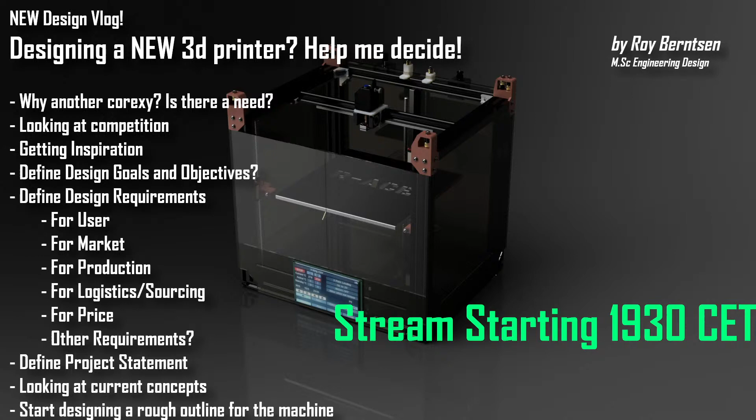Okay guys, so I'm starting another design vlog. It's been like 2 years since the last vlog, and I was pretty happy with it, and it's pretty much what I do best, so let's stick to what I do best and make another design, prototype and build vlog for a new 3D printer.

And we want this machine to be a premium one, so I need your help to decide what kind of features and functions and product choices we want for this machine. So I started making a document. Anything that you can chip in is very helpful, because I cannot do this alone. This is going to be a community-based thing. So let's have a look at what I started.

So bring you guys over to the other screen. Let me see. Just a second, guys.

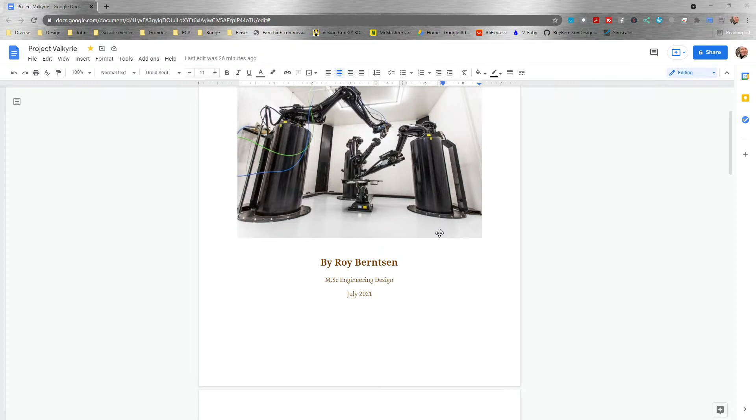There we go. Okay, so here you can see Project Valkyrie. Designing a high quality 3D printer, what I mean is a premium one. I already have done 2 printers. I designed my first printer in 2017, the V-King. Then we did the V-Baby in 2019. Then we did the V-King version 2 upgrade. We can have a look at those machines.

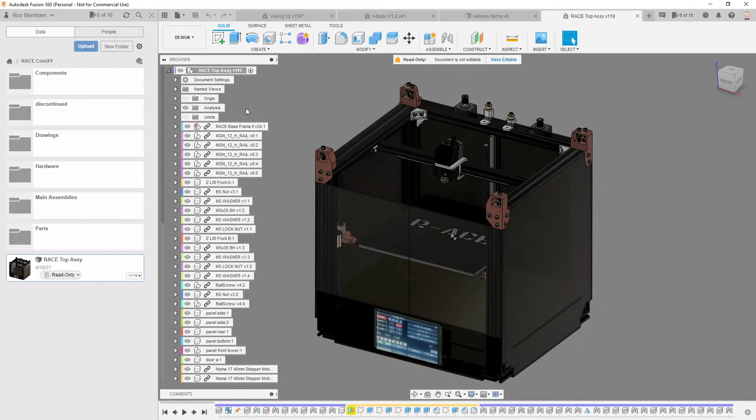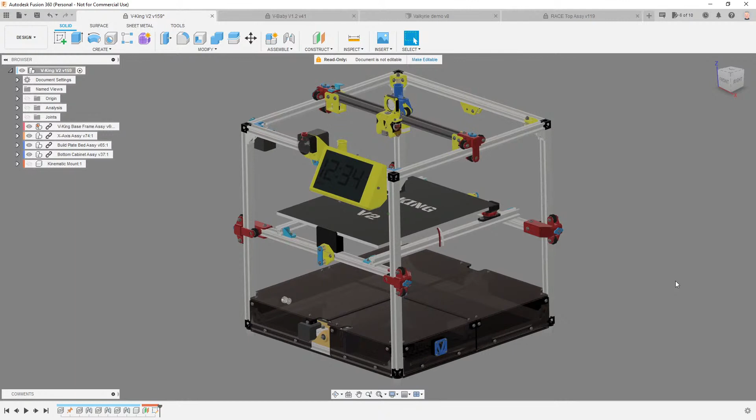So this is just a sketch basically. It's something I want to show you, because it has some functions which I would like to implement in the new design. So this is the V-King. Some of you know this machine from before. It has been downloaded like 10,000 times or something, and there's a big community building this machine all around the world.

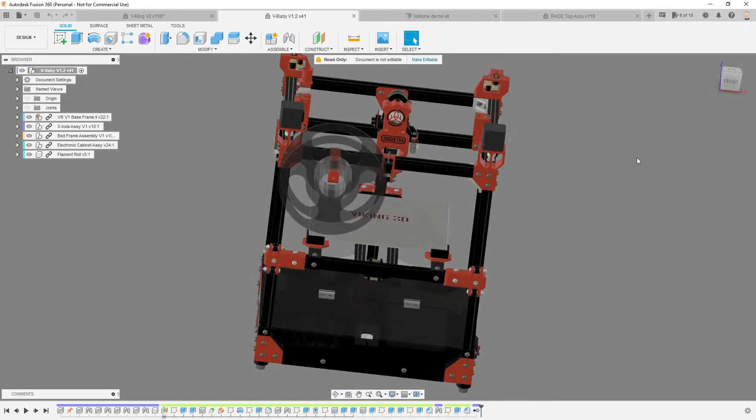And yes, it's a CoreXY. All the printers are CoreXY. And then I wanted a desktop CoreXY, so I designed this one in 2019. It has been upgraded as well, so this is version 1.2, and it also has the Triquetra direct drive toolhead with the Mjolnir extruder. These machines are great, but I would like to do something more premium.

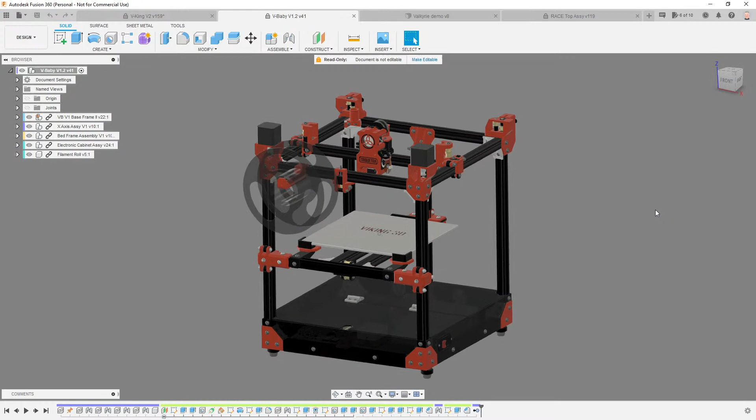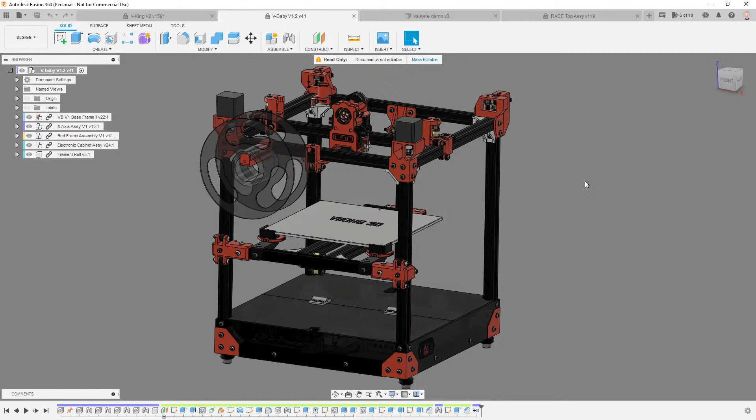And what I mean with that is that we want it to be enclosed. We want a lot of nice features like a kinematic bed, or at least Z-lift. We don't know what the Z-lift is going to be at this point. You can chip in commenting what you would like to see for the Z drive. But at least I want it to be kinematic.

If you don't know what kinematic coupling is, you can Google that. I'm not going to go into details. We're going to look at Maxwell coupling, then you'll see what I mean. It basically is that we have 3 lifts for the Z drive, and the 3 points stay exactly in the same place at all times. So it's very nice. It's similar to the V-Core.

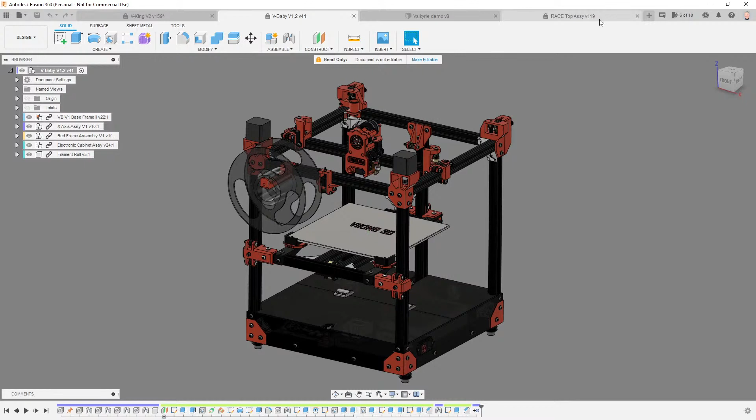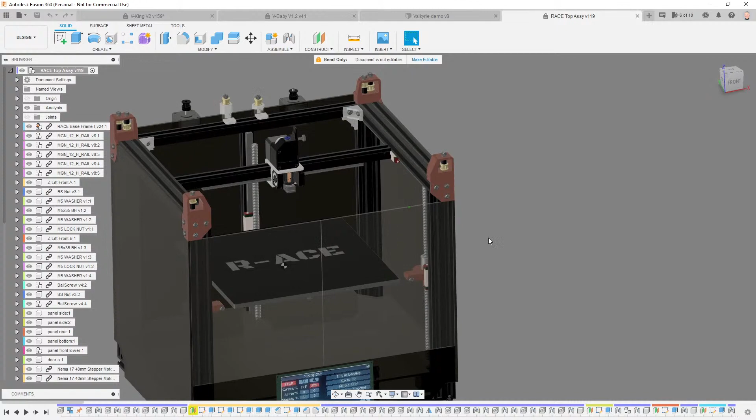We are also going to talk about the competition, what kind of competition we have and what we should look out for. So this is something I started quite a long time ago, just to look at how to enclose things, and using 2040 profiles maybe. We don't know yet at this point. Also here I was looking at using ball screws.

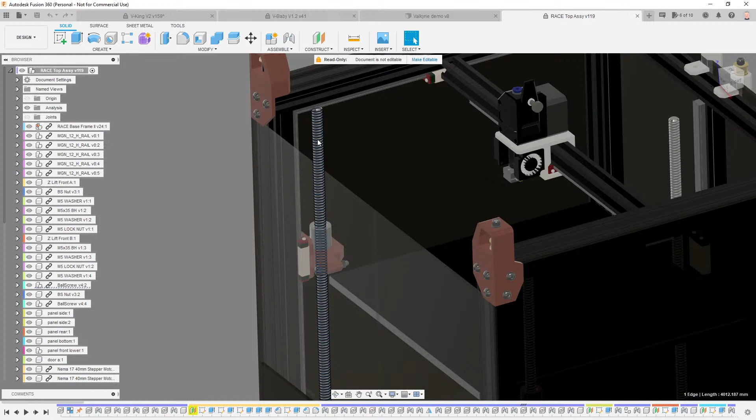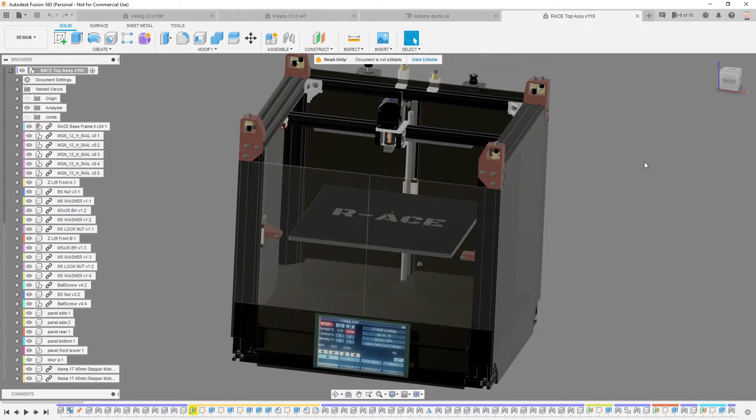Maybe we are going to go with a belted solution, because we don't have to worry about wobble using belts. I have belts on the other machines, so it should be a good option. The Voron also uses belts for the Z drive. And of course we want auto tramming, so that the kinematic Z-lift will tram itself automatically before the print starts.

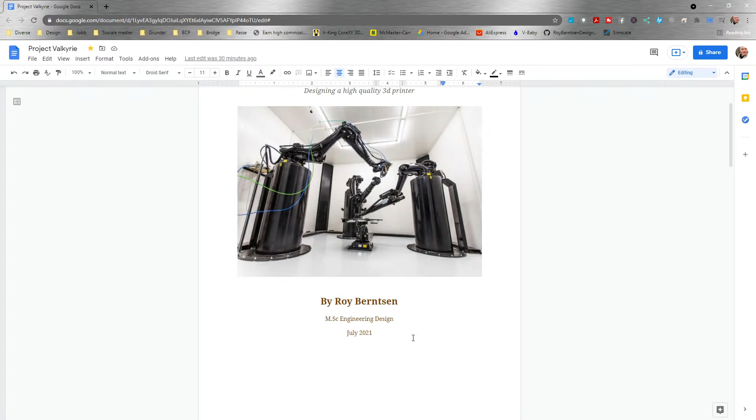And it would be nice to have a great touch screen, and of course internet connection. These are things we are going to talk about now. So let me take you to the document I was looking at. I just started this and I need your help here as well. Let me see if you are in the chat.

Okay. So for terms and conditions: general requirements, product choice. The aim is to develop a premium DIY FDM 3D printer for the DIY 3D printer community. We want an advanced Z-lift with kinematic couplings, a good size and responsive touchscreen, and the product should be open source. Of course, there's going to be more here, but I will come back to that.

As a function choice, we would like all functions for a trouble-free user experience. The aim is to implement all basic functions plus any feature that makes a premium 3D printer.

This is going to be an FDM printer, so auto tramming, and of course able to connect by internet. We are going to come back to the requirements and look at the competition. Of course, we have the Valkyrie, we have the HevORT, we have the Voron, and we have, I forgot, the BLV MGN Cube.

Well, who else should we look at? I know we have the Annex. It's not really the same. The Annex printers are a little bit different, so I don't really compare those as competition, but we can write them up. Annex Engineering.

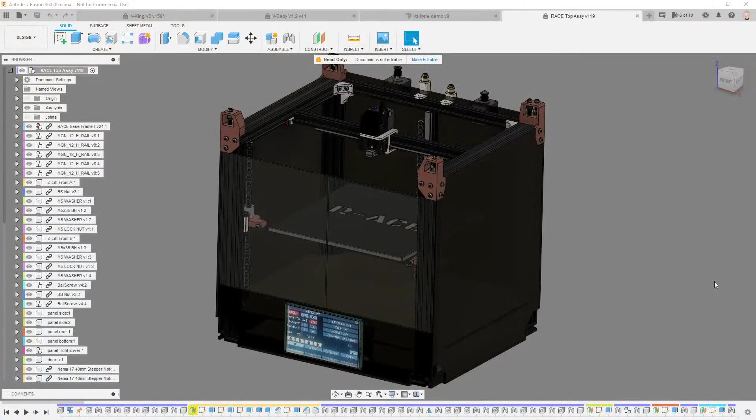So we will start in the next vlog. We will start the design, or I will start to design something. So you will have something nice to look at, so you don't have to look at boring documents and whatnot. But of course we can take a look at the race one more time. This is something I started, like the railed advanced CoreXY 3D printer, but I basically started designing on an old frame.

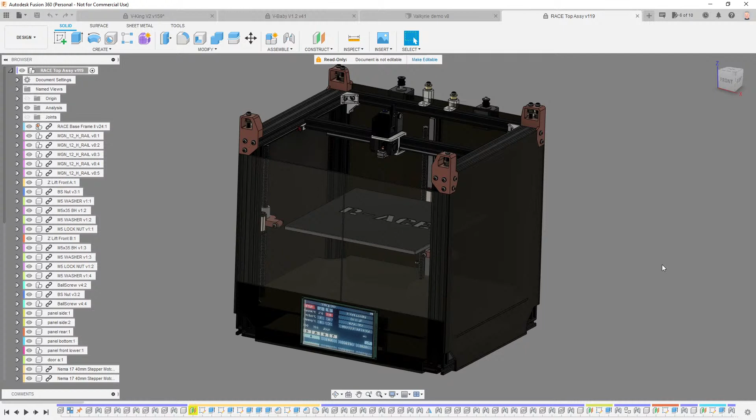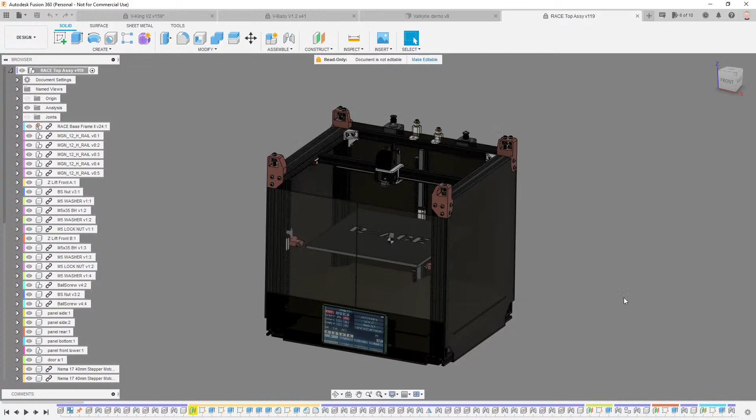So at this point I want to start from scratch, and I want to do it all parametric, which means that we can go in and change the size of everything in one file. If I do it parametric, then I can go to modify, I can change the parameters, so we can change the size of the profiles, and everything will follow. Should be very nice to have.

Also, what kind of size, what size machine should we have? Guys, what size machine? This is also something we should talk about.

Maybe you should have that in the product choice. Let's write something here about the size. Size should be, of course, it should be possible to decide sizes. If you want 200, you can get a 200, and if you want a 300, you can get that. But let's say should be variable, or what do you say? It's not the right word.

Andrew is saying 350 by 350 by 450. Do you want it so big in the Z direction, Andrew? 300 squared, Baki is saying. William wants 400. I think 400 is too big for a CoreXY, I'm sorry. Then we would look into using 9mm belts, I think, because the belts get really flimsy when you get over 350. The V-King is 380 in the Y direction and 340 in the X direction, and I think it's on the edge of what I would do. So I'm thinking 350 at the biggest.

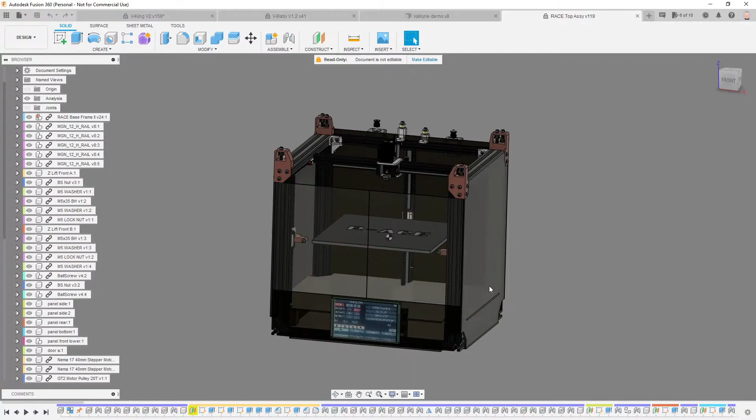Belted Z, yes, we would like. Personally, I would like to see belted Z. Let's write that here. The Z drive. It's nice to have. Or we could do ball screws. I'm not sure at this point. I don't think we should put it here. Actually, I do have a lot of ball screws. I ordered ball screws for this guy. So I have 3 ball screws. Not very good quality, so I'm not sure how straight they are, but yeah.

Let's write in here in product choice, belted Z or ball screws. I do not want to use, what are the other screws called again? Yeah, the ball screws I bought are not so expensive, and I don't think we should focus too much on price for this guy. Of course, price is important, so we should talk about price. But where would you set the limit to build a machine like this? Would you like it to be sub $1,000, or could we go above $1,000?

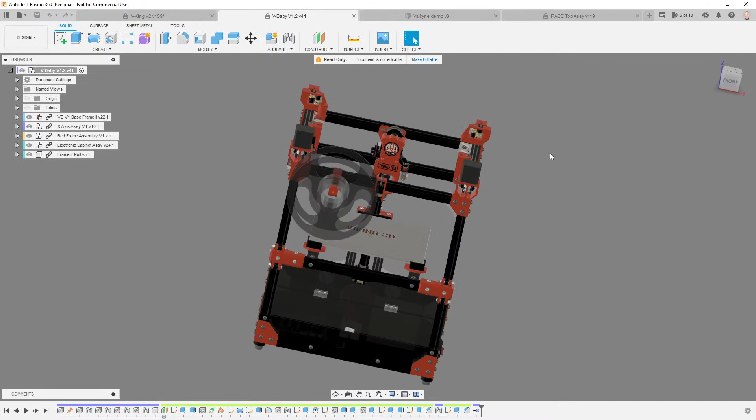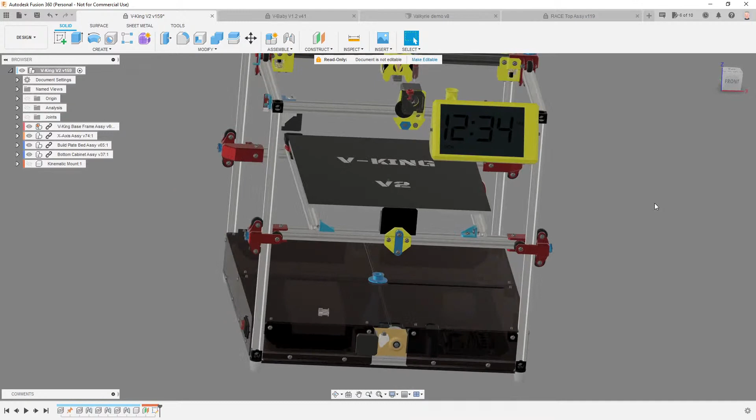The current machines are priced at about 850. When I say the current machines, I mean the V-Baby, this guy, is coming out at about 800 something. Actually almost the same as this guy, even though this guy is bigger, but it doesn't really matter for the price. Size is not an important factor for the price, because the profiles, if you order 3 meters or 4 meters, it's not so important for the price.

But we should have that in mind, of course. So belted is of course a cheaper solution, but the one thing with the belted gear, the belted Z, is that the Z drive will fall down when the motor is not powered. That's actually not a big problem unless you want a resume function. If we do want a resume function, then belted Z is not good.

So what do you think about that? Let's write resume function. I'm not sure. Yeah, you can see my screen. Resume function. I will not have that as essential. We can have it as nice to have.

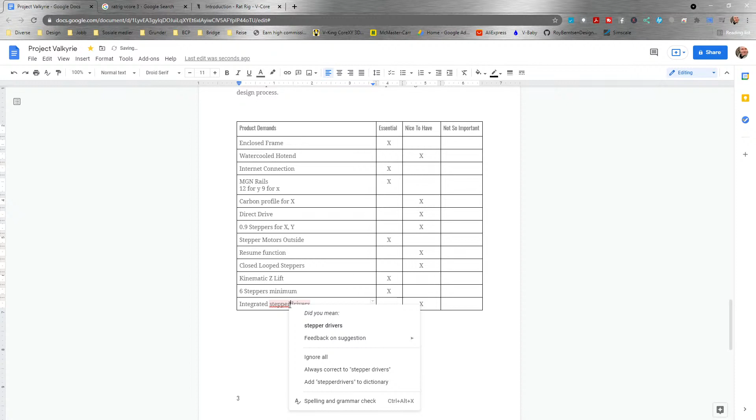Of course, it was supposed to be stepper drivers. Like this. What do you think, guys? Do you like the 6 steppers, or... you can get Duet clones for a good price now.

The Duet, Fysetc is currently selling the Duet Wi-Fi 2, the Duet 3, the Duet Mini 3 for about $60 US. So it's not expensive at all. And those are great. They have integrated 2209s. I will write here 2209s. I would like the 2209s. We could of course do other types as well, but yeah, just have it there.

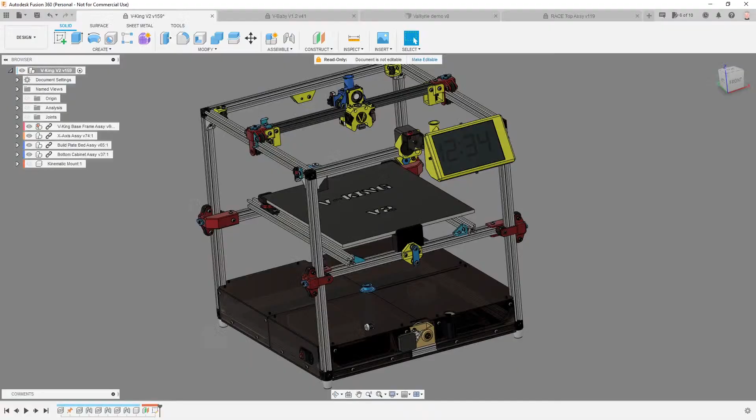Let's have a look at the machine one more time. There we go. Too many windows, guys. It's hard to navigate. So, I don't know if this placement is good or not, but this is just a mock-up with the doors in the front, and I never got to design the top. Of course, there should be a top here.

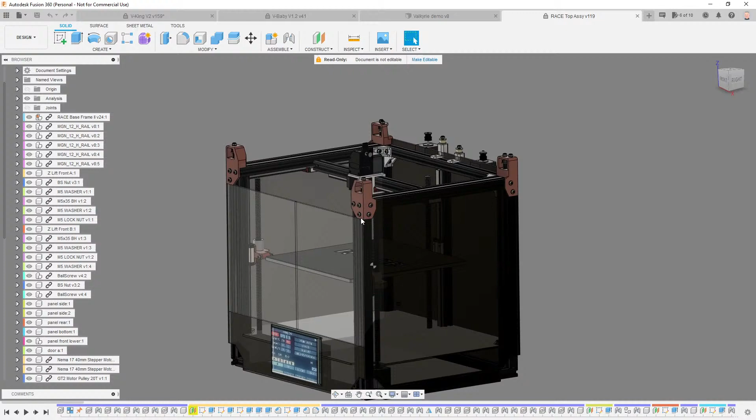And as you see, I did put the steppers on the back, like this. And then there will be some extra idlers here for adjusting the tension. So of course, we also need to write, we need tensioners. Belt tensioners, very important, on XYZ. This is important. Don't you think this is important, guys?

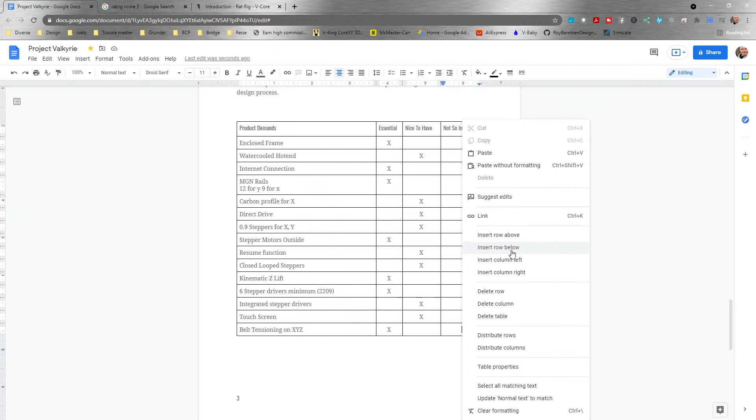Stepper motors outside, resume function, closed loop, kinematic, Z-lift, minimum 6 stepper drivers, integrated maybe, touchscreen maybe, belt tensioning, yes. So what more do we have?